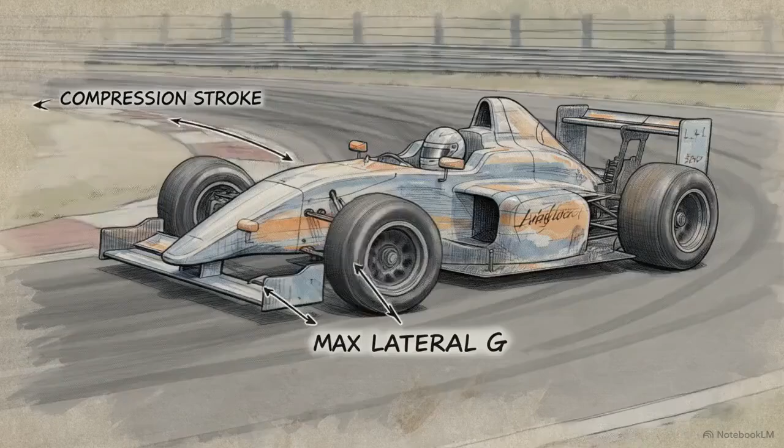Almost every single motorsport discipline is an exercise in engineering a machine to operate against strict physical boundaries. In Formula One, teams optimize for extreme agility and rapid acceleration, confined to the parameters of short 300-kilometer sprint races. Endurance racing demands the exact opposite.

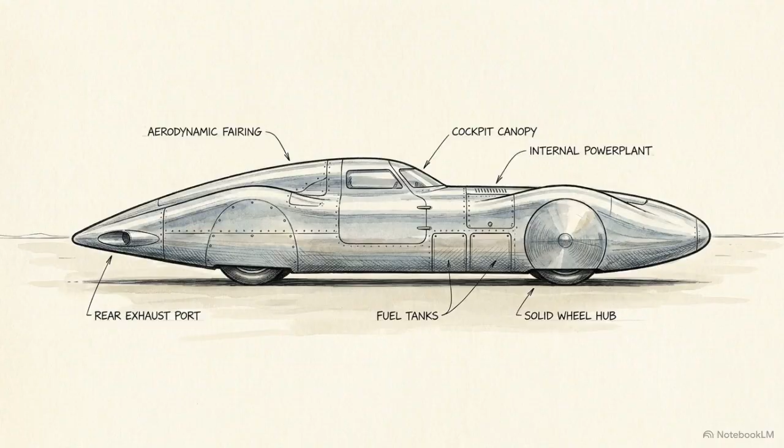Engineers prioritize thermal efficiency and component survival, ensuring the vehicle can withstand 6,000 kilometers of punishment over 24 hours. But there is a third environment, one eliminating the need for braking zones and corners entirely, replacing them with a flat, isolated expanse of salt. Circuit racers must compromise, balancing downforce against drag and cornering speed against tire wear. A land speed vehicle strips away all conflicting demands to solve a single problem: the localized discharge of absolute, uncompromised energy in a straight line.

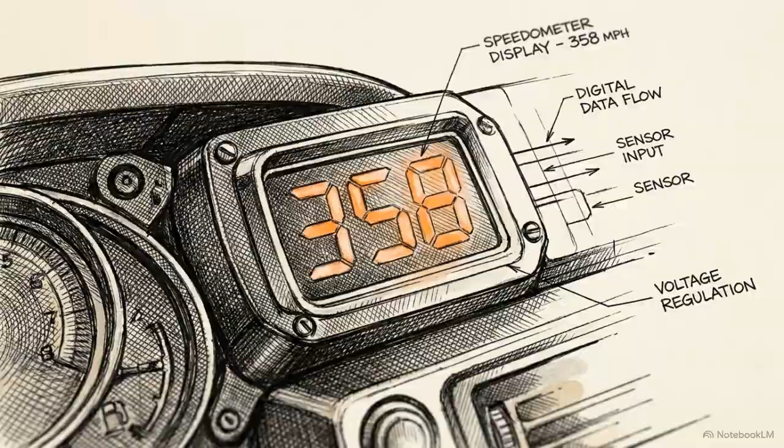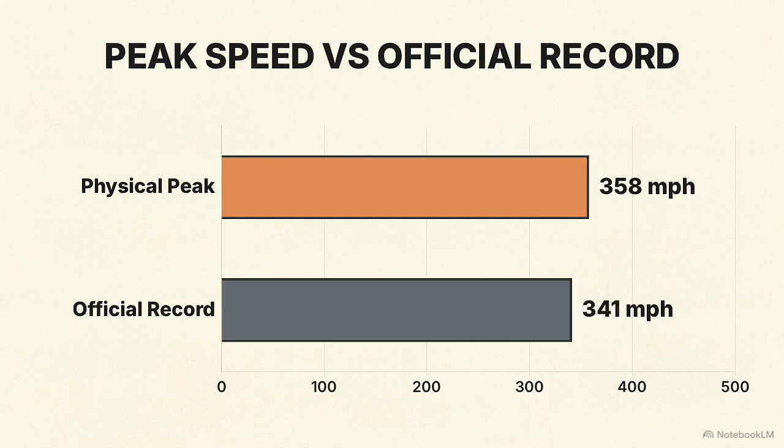The Venturi VBB-3 was built to test the extreme limits of electric thrust. On the Bonneville Salt Flats in 2016, its dual electric motors pushed it to a peak physical speed of 358 miles per hour. Yet its official, recognized world record is locked at 341.4 miles per hour. A 16-mile-per-hour discrepancy exists because top speed is not a matter of what a car can physically achieve on a single run. It is governed by a punishing international regulatory framework known as FIA Appendix D.

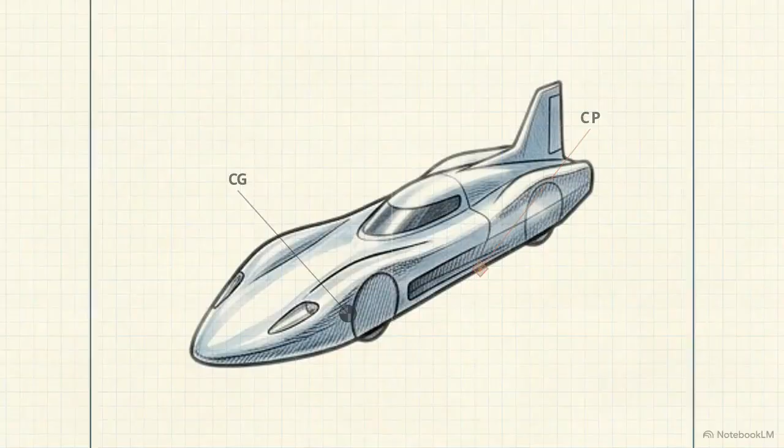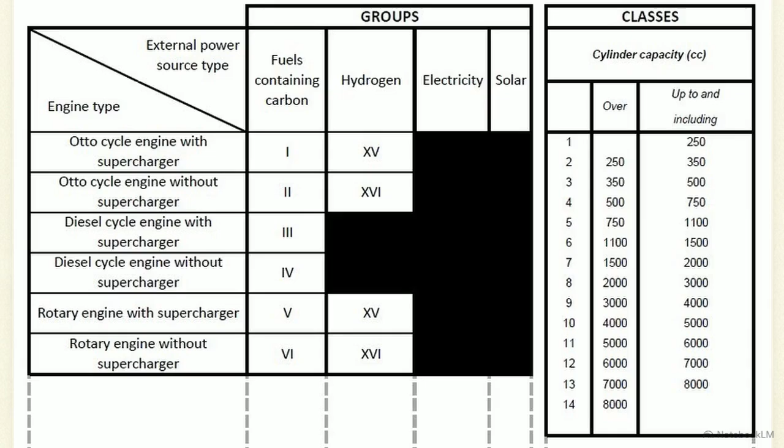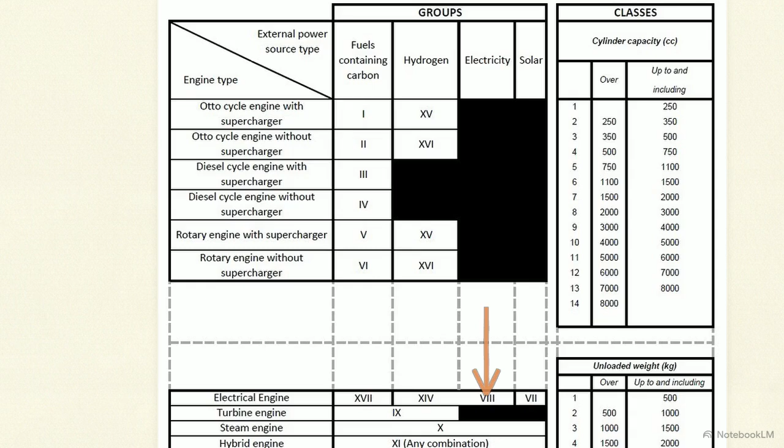Category A defines automobiles completely divorced from series production, custom-built machines answering exclusively to the physics of top speed. Looking at engine types, this matrix places the VBB-3 exactly into Group 8, designated for electrical engines powered purely by electricity. This table details the allowed weight classes. Unlike Formula One, which strictly limits minimum mass to ensure agility, Category A accommodates extreme weight, with Class 11 allowing for vehicles exceeding 5,000 kilograms.

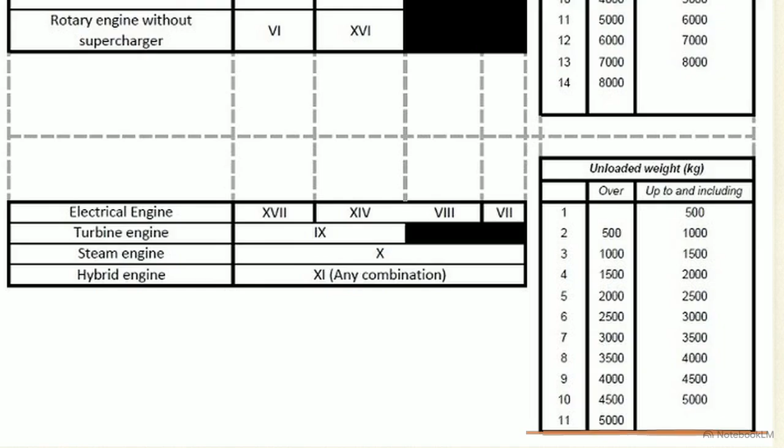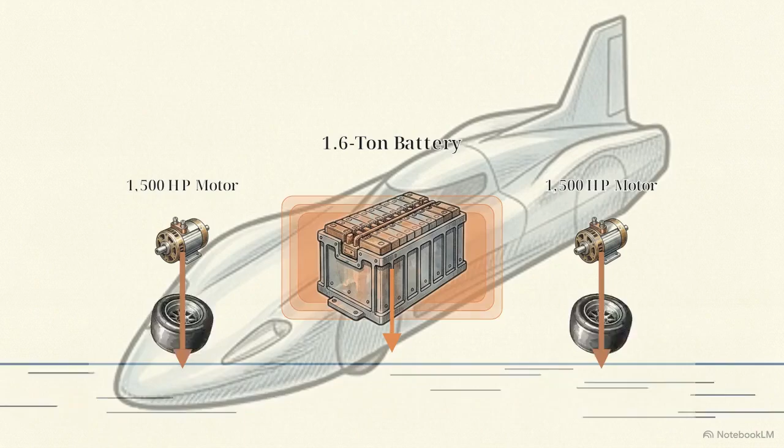Because weight is unrestricted, Venturi's engineers equipped the VBB-3 with a pair of 1,500 horsepower electric motors and a massive 1.6-ton lithium iron phosphate battery. This pushes the total vehicle weight to 3.5 tons. At 300 miles per hour, generating aerodynamic downforce creates too much drag. Instead, engineers use the battery's immense gravitational mass to force the tires into the salt and convert torque into raw tractive force. In this arena, mass is a critical engineering tool to anchor extreme thrust to the earth.

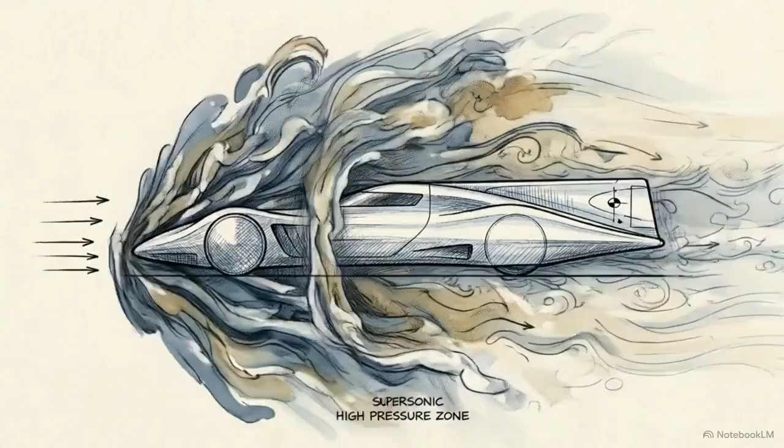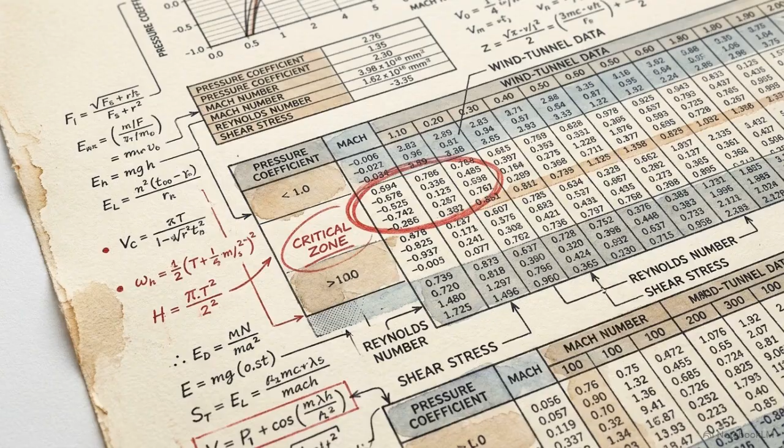Once a car approaches 550 kilometers per hour, the atmosphere transitions from a fluid into a solid physical barrier. FIA Article D1.1.5 requires engineering teams to submit mathematical proof of aerodynamic stability in yaw before the car is ever allowed to run. The math hinges on a critical physical relationship: the distance between the vehicle's center of gravity, its mass, and its center of pressure, the exact point where wind forces act on the bodywork.

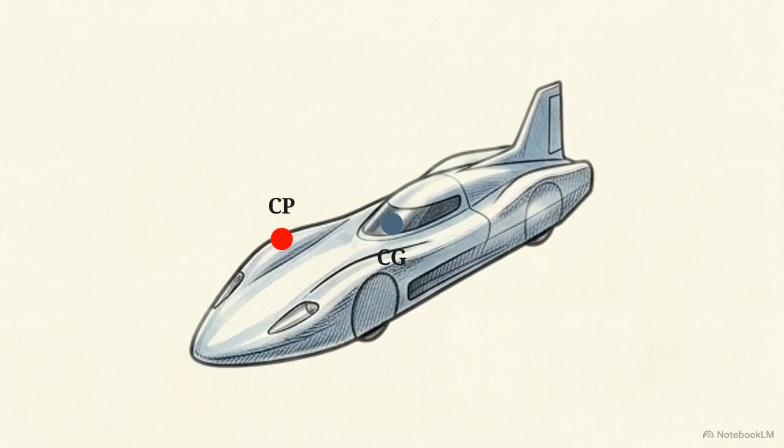If the center of pressure moves ahead of the center of gravity, the vehicle acts like a reversed pendulum. A slight crosswind will catch the nose and cause the car to violently spin out. Engineers designed the bodywork to keep the center of pressure strictly behind the center of gravity. Now that same crosswind pushes the tail back into line, using the air itself to auto-correct the steering. Circuit racing uses wings to press a car down into a track. Land speed engineering abandons that entirely, shaping a self-correcting aerodynamic dart.

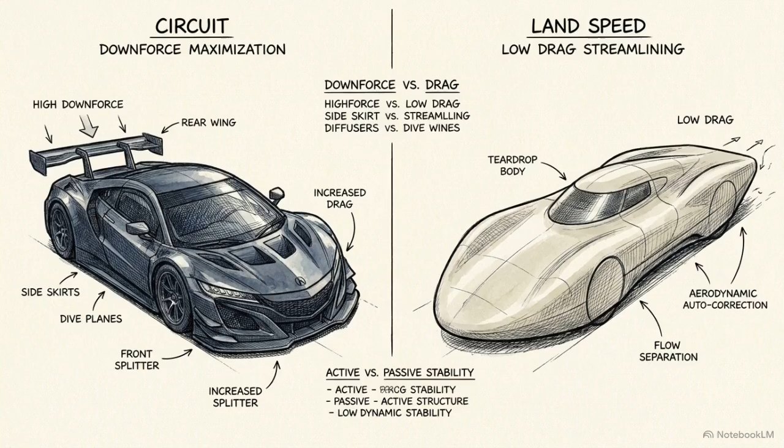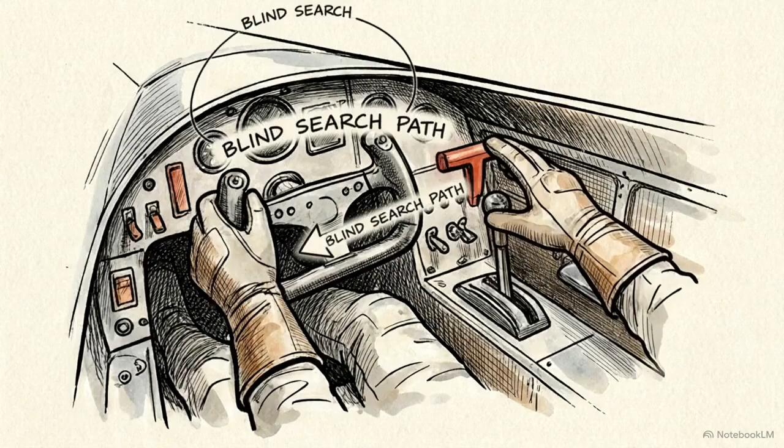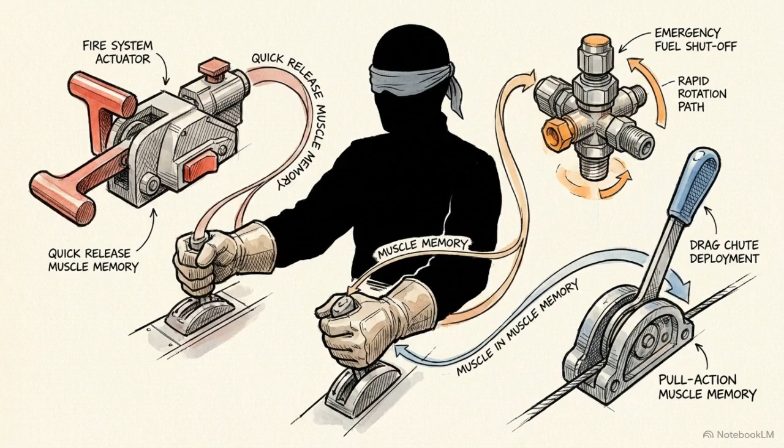Inside this 3.5-ton missile sits a fragile biological component. Under Article D11, the FIA scrutineer must verify that the driver can survive a catastrophic failure before the electric motors are powered on. This begins with a highly rigorous safety protocol specifically outlined in Article D11.3.2 of the rulebook, the blindfolded cockpit orientation test. Wearing full safety gear, the driver must rely on pure muscle memory to locate fire actuators, fuel shutoffs, and parachute levers in the dark.

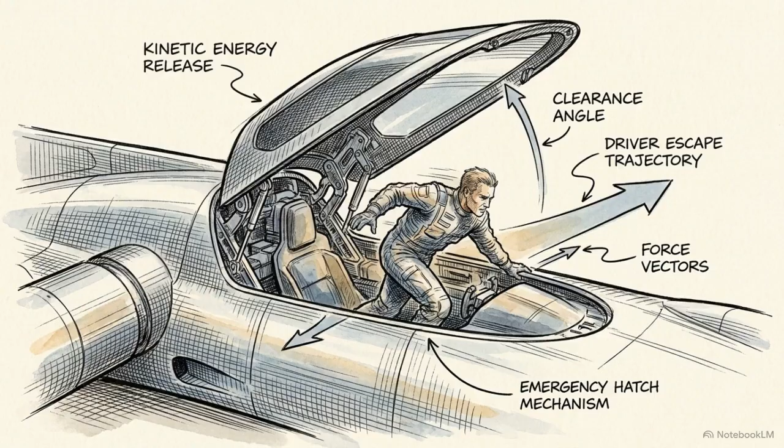Following this, Article D11.3.3 demands that the driver, bound by a multi-layer SFI standard fire suit, unlatch the safety harness, and escape the sealed canopy completely unassisted in under 15 seconds. The vehicle is treated as a highly volatile environment. The driver must be biologically programmed to escape it.

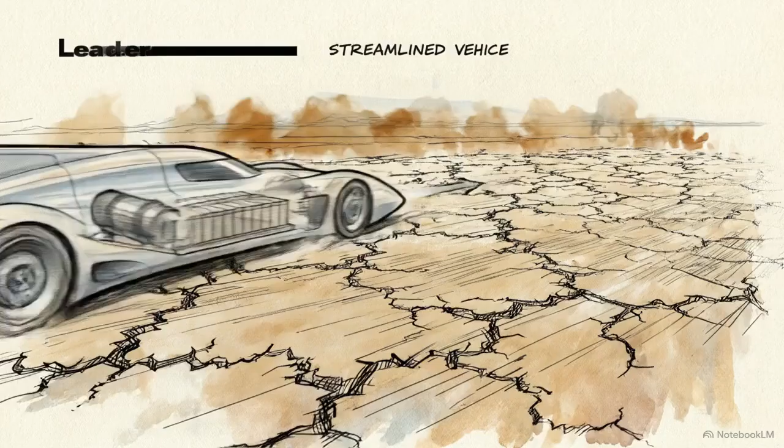The record attempt itself takes place on a vast, temporary open course, exactly like the environment of the Bonneville Salt Flats. Before any run, surveyors verify that the course does not exceed a 1% gradient over any 100-meter section. You cannot use gravity to achieve top speed.

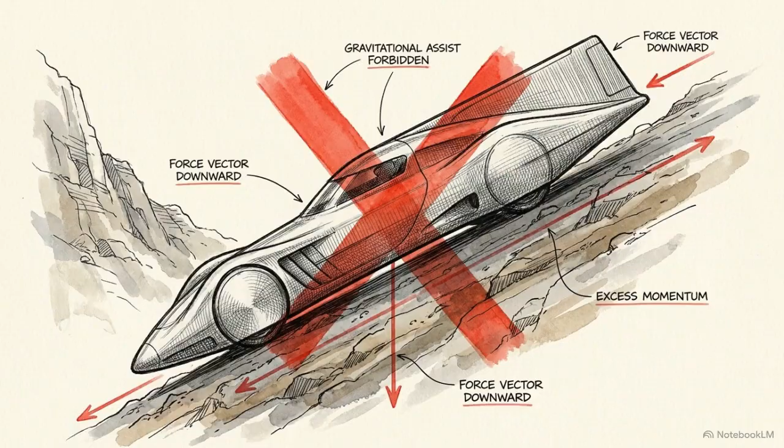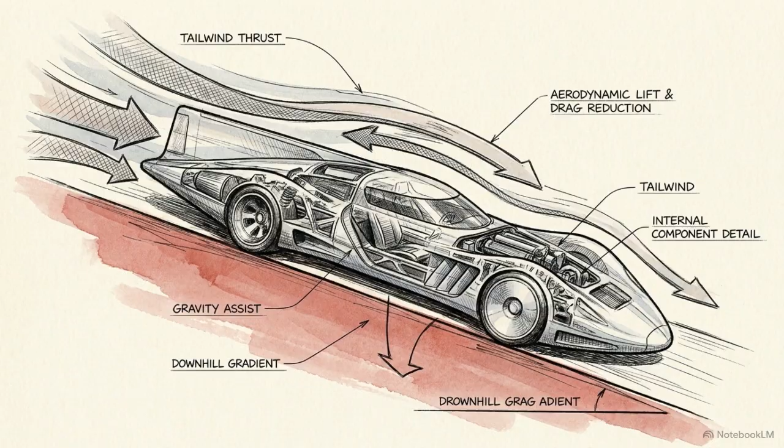This brings us back to the VBB-3's 358-mile-per-hour run. A single directional pass is inherently corrupted by imperceptible slopes and favorable tailwinds. Article D13.2.3 neutralizes these advantages with the 60-minute bidirectional rule. The vehicle must make an outbound run, come to a complete stop, and run back through the same trap in the opposite direction, all within exactly 1 hour.

For an electric vehicle, this creates a severe engineering crisis. The team must manage the massive thermal overload of a 2-megawatt battery discharge without the luxury of time to let the system cool down between passes. An absolute speed record is a brutal, localized endurance test. It is a battle of thermal management squeezed into a merciless 1-hour window.

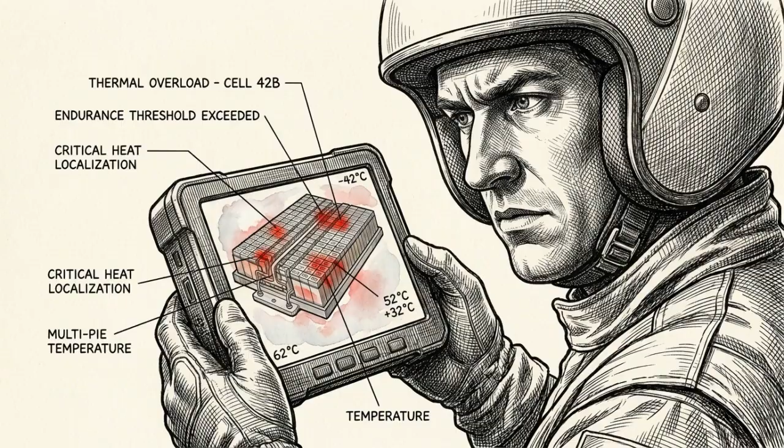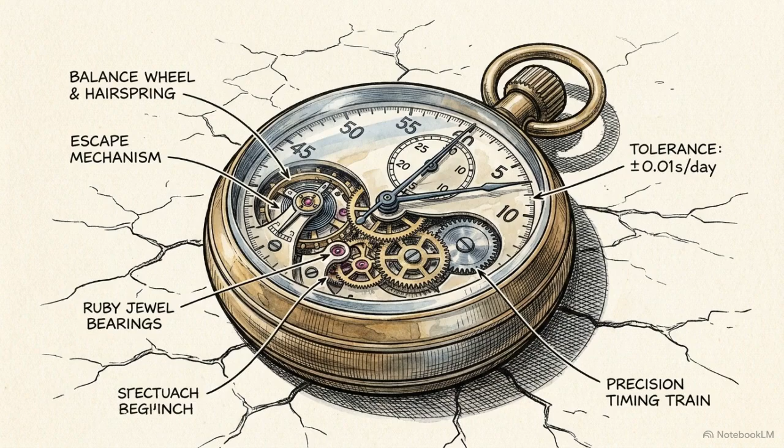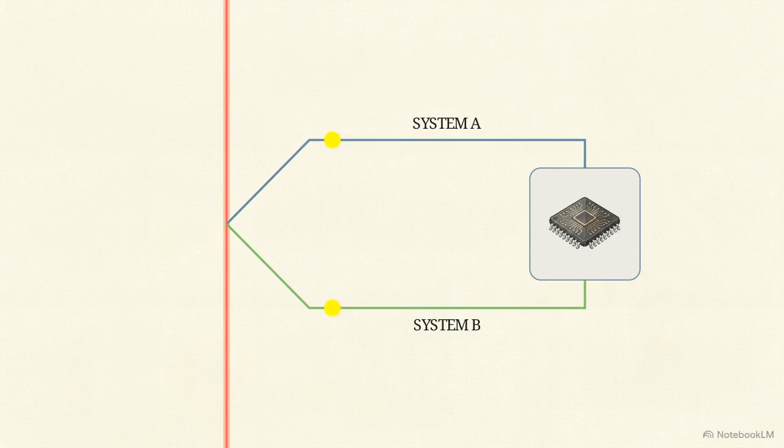The final regulatory hurdle is recording the precise speed of the vehicle as it crosses the surveyed trap. Human intervention is strictly forbidden. No official is allowed to press a stopwatch or interpret a time. Articles D13.1.2 and D13.1.3 dictate the use of redundant, parallel, automatic timing systems that log the data directly to non-volatile memory.

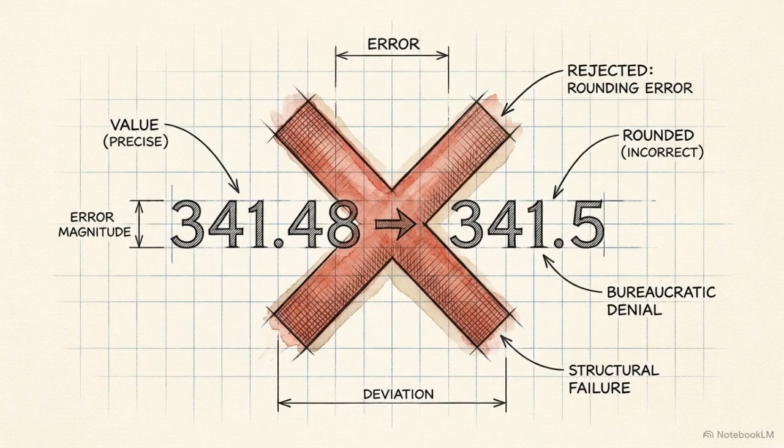Article D13.3.2 enforces mathematical severity. The mean time must be calculated exactly to the 1,000th of a second. The FIA dictates that the resulting calculation cannot be rounded up or modified in any way to gain an advantage. The VBB-3 achieved a peak of 358 miles per hour in one direction, but its official, recognized record of 341.4 miles per hour is the strict, unrounded mathematical average of its 2 grueling passes.

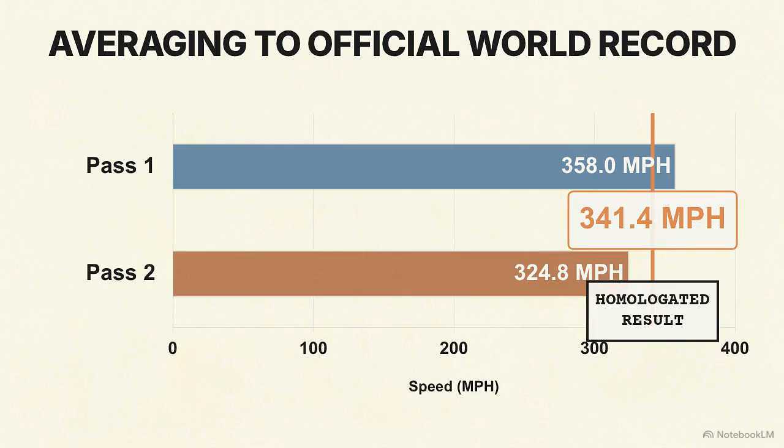A land speed record relies on both brute force and extreme bureaucratic precision. It is a highly formalized scientific experiment, engineered to exploit the absolute limits of earthbound physics.